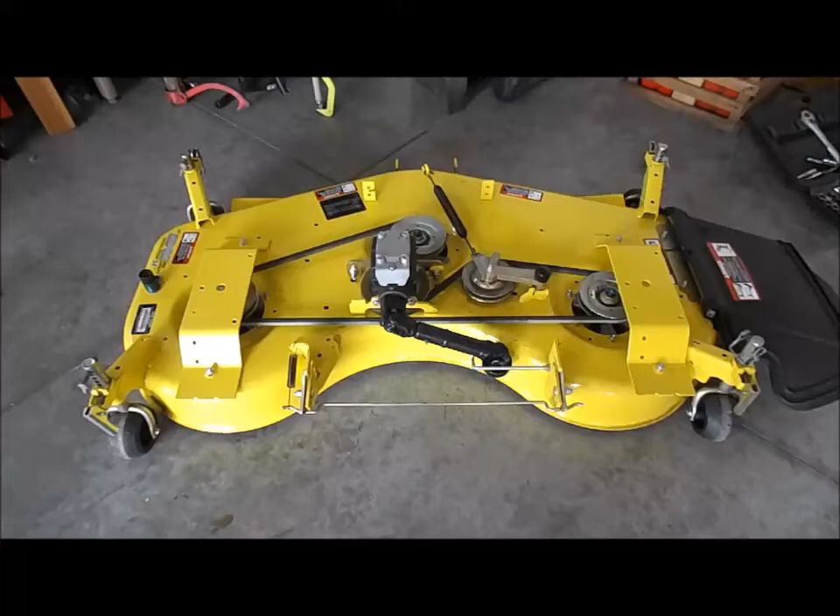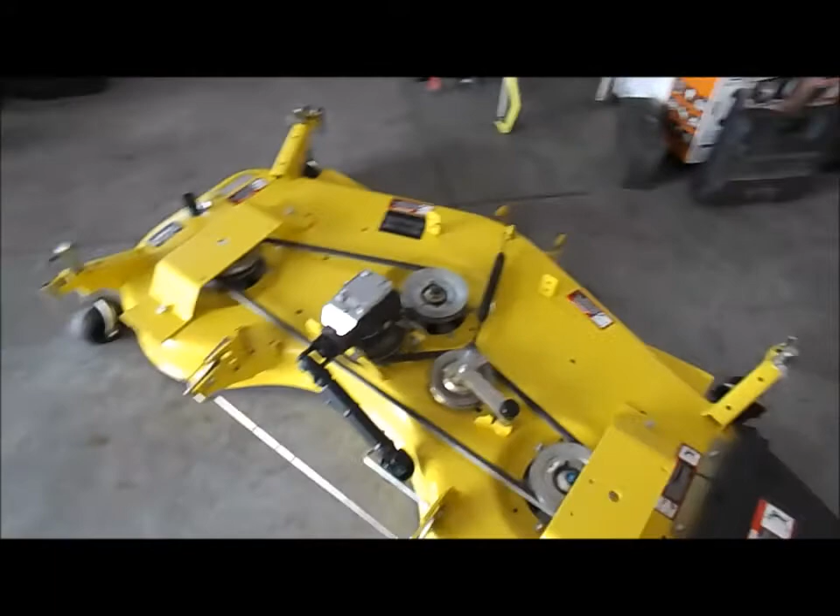Alright, so I'm getting set to put the deck back on the X738, and I thought I better check the owner's manual here because I haven't, and I've always wondered about this gearbox. Obviously there's a fill plug here and probably the oil check as well, so I'm going to check the owner's manual before I put it on the machine so I can do all the checking. I already went through and greased it, and I got to put the blades on after sharpening them, so let me check the book.

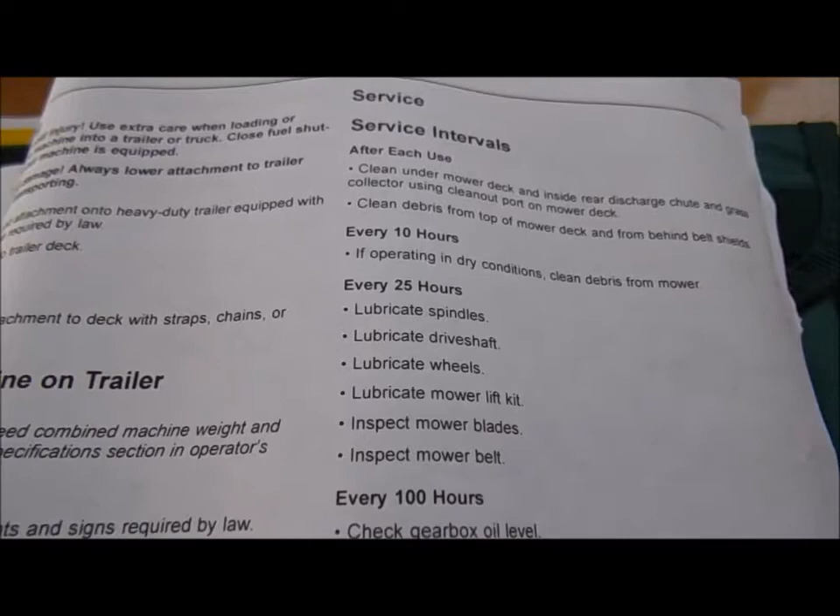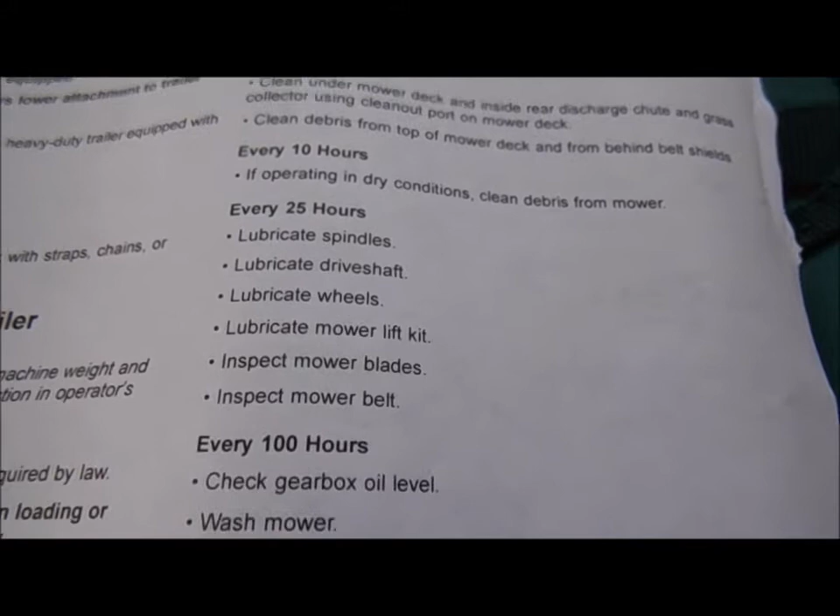Okay, going through the service intervals here, it says every 10 hours, if operating dry, clean debris. 25 hours you should lubricate the spindles, driveshaft, wheels, mower lift kit, all that stuff. 100 hours it says check gearbox oil level, and right now I'm at 108 hours on the lawnmower, but I did a bunch of snow blowing over the winter, so I'm going to check it anyway. Then it says every 500 hours you're supposed to change the gear oil. That's all it says on this page.

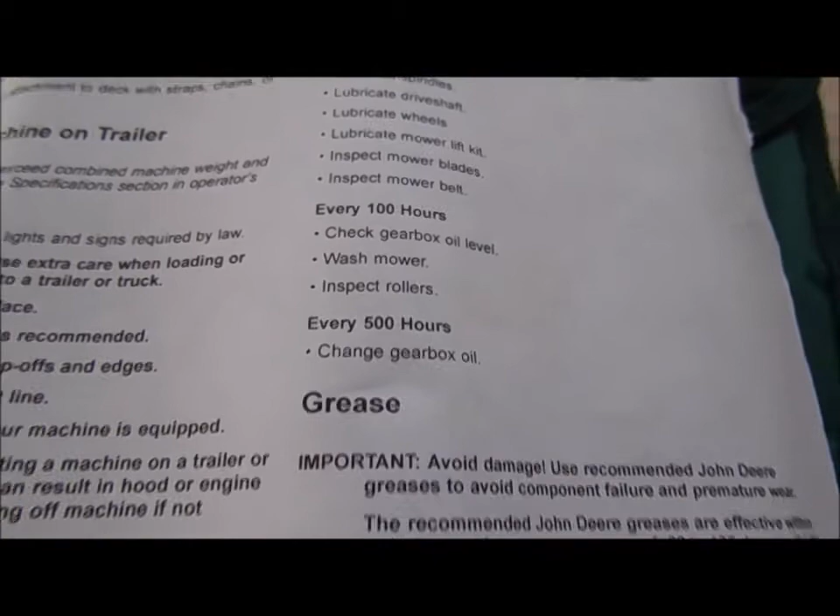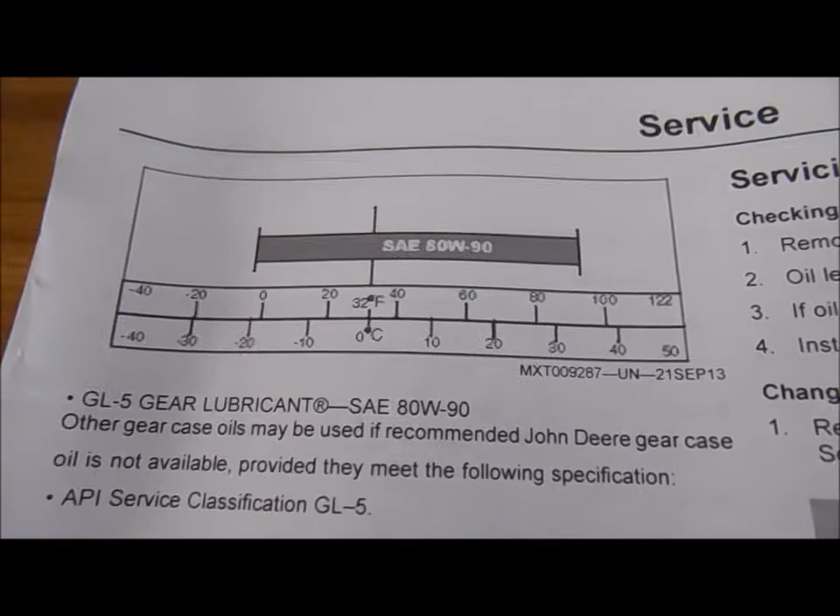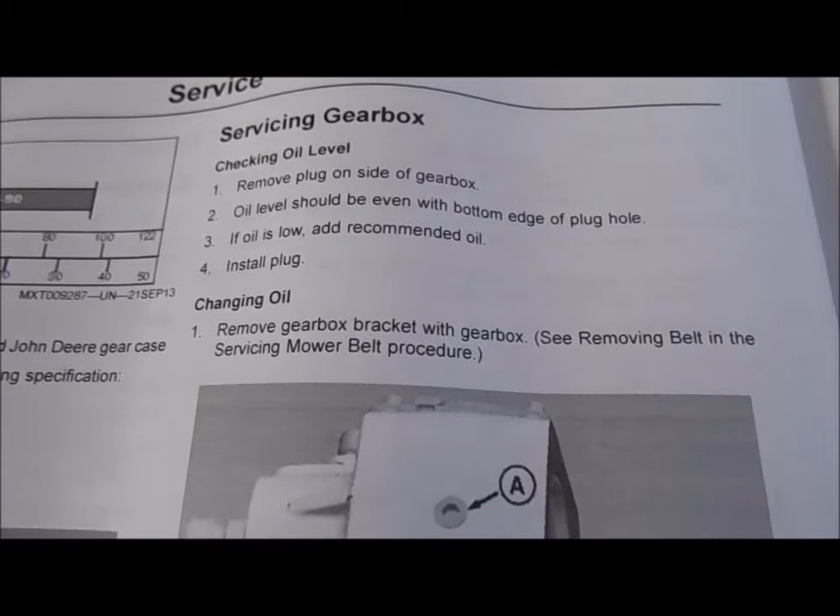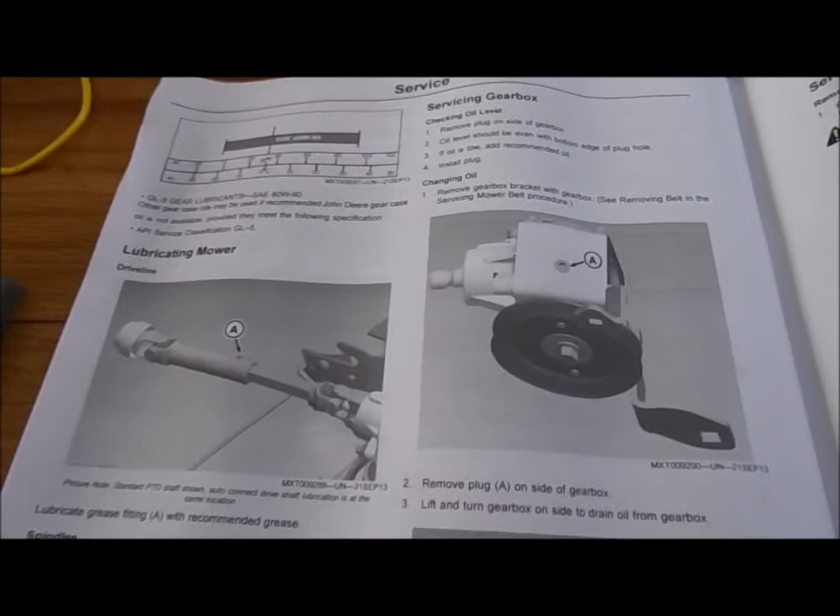If we turn the page, at the top it lists the type of oil, which I figured was 80W90, just a gear lube, GL5. For checking, it says you're going to remove that plug, and they show a little diagram here. Oil level should be even with the bottom of the plug hole. If oil is low, add oil as recommended, install plug. That's a pretty simple check, something some people may end up missing, and I would imagine a gearbox getting torn up like that would not be a good thing.

Alright, so what I'm using here is an 8mm, this is like an Allen type, square drive type that I'm going to go in. It's just on a 3/8 ratchet.

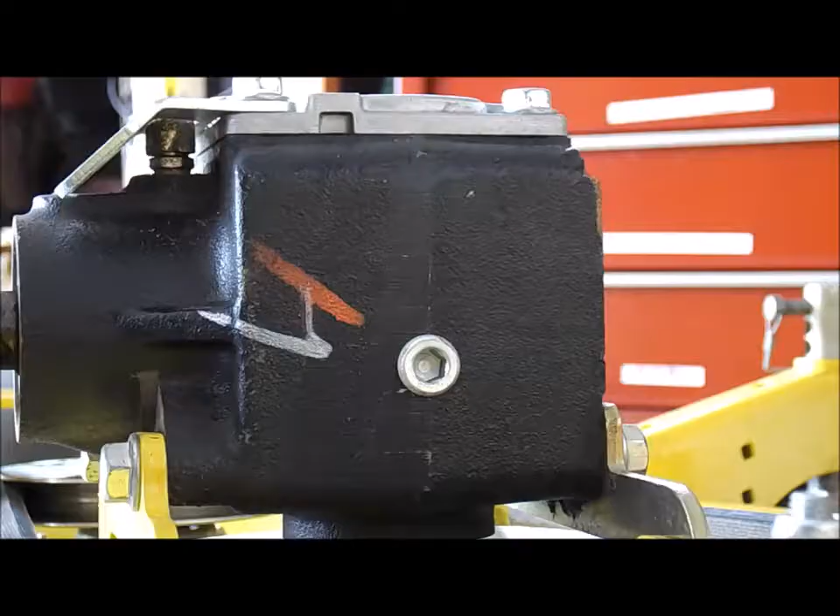Okay, one thing to note here, we'll see when we open this up. I'm going to take this out. This deck was actually set up on end just for storage, and I kind of chained it to the wall so it can't fall down. It stores nicely that way, it'll store upright real nice.

So I don't know if all this gear oil is where it should be. It's about 50 degrees or so in the shed here, so hopefully by this point it would be settled, because I've had it down here for probably about an hour. We're just going to take this out. I don't know if we'll need to put any thread seal on here or not. I'm willing to bet that as soon as we pull this out, there's going to be oil that comes out a little bit.

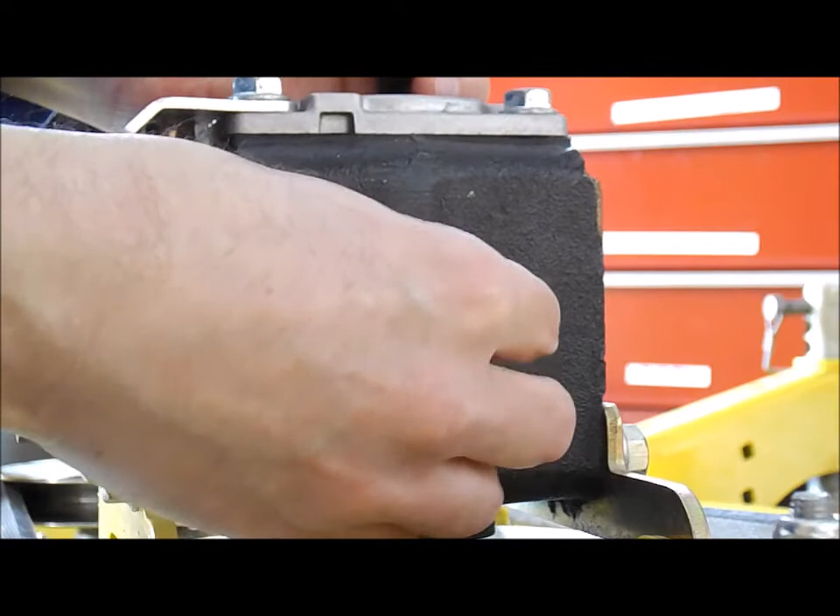It says that the oil should be at the bottom of the hole. Okay, well, nothing came out, that's good I guess. Wow, I don't see anything in there. That'd be cool, that's going to be a call to the dealership if there was nothing in the gearbox, because that should have already came prepped, ready to go. Let me pause here for a second.

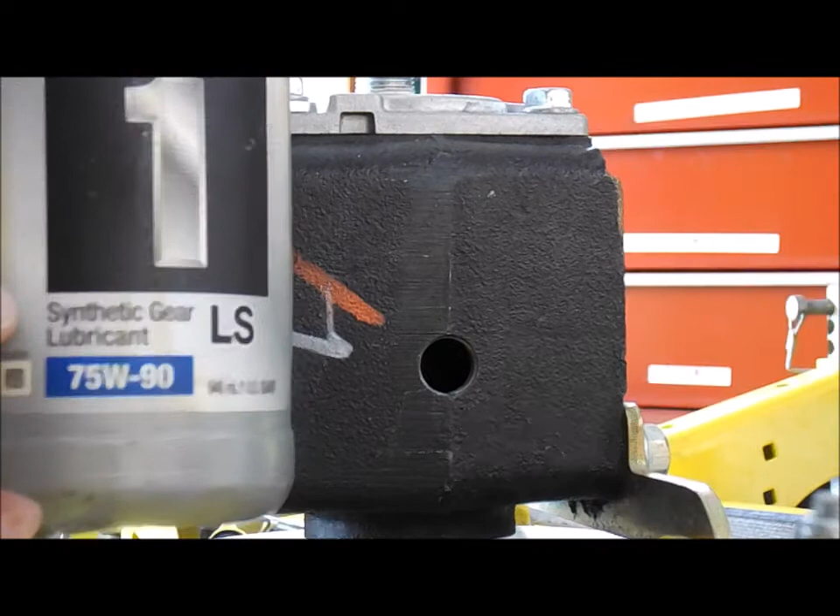Okay, so upon further inspection, there is oil in it, thank God. However, it's not to the bottom of the threads, it's probably just below, and according to what it says, it should be to the bottom of the threads. So I'm just going to use, you probably can't see this because I got the camera too close, oh, this is 75W90, that's not really the right stuff. I may end up putting that in because I'm not going to buy special gear lube for that little bit.

This is synthetic, I think I used this in a car axle or something, so I'm just going to put some of this in and we'll see how much it takes. There's not much in here either, because like I said, it was on a Crown Victoria, an axle seal bearing I believe. I don't know, it's hard to tell if I'm putting anything in or not. Yeah, there's not much in here.

I don't want it spilling out either, let's see how close we are here. Oh yeah, it's just now to the bottom of the threads here, I'll show you with the camera in a second. I'm just going to give it a little bit, whatever I got left in this container. Gear lube, smells good, if you don't know what I'm talking about, get some gear lube, take a big whiff. Alright, let me pause here, get my hands ungreased.

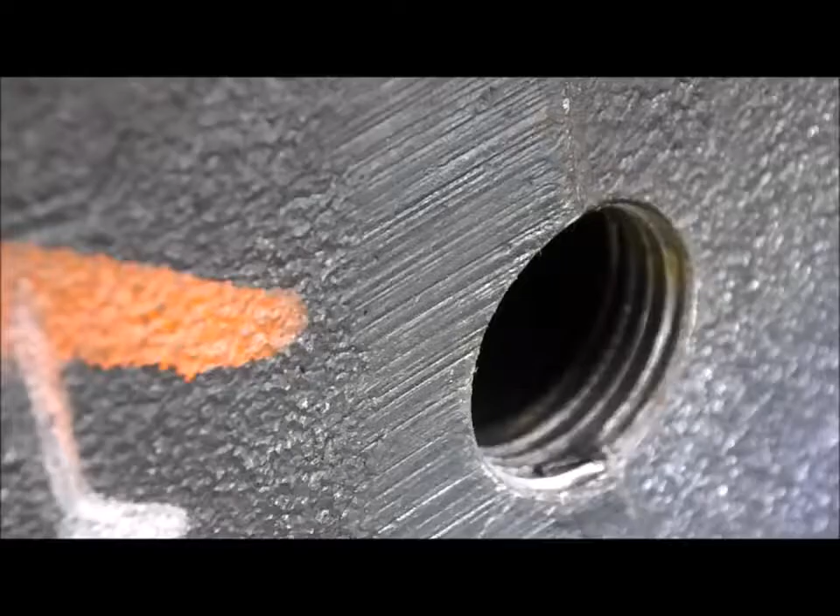Okay, so you can see on that inner thread the oil is just touching that, so that's perfect, that's exactly where you want it. You could probably put a little bit more in so it comes out, but I don't know how much pressure that would build up, and then you'd probably end up blowing out this seal here on the PTO, so you want to be careful with that. You don't want to put too much oil in. It looks like there is a breather right on top here.

So yeah, that's interesting that it was a little down, I don't know, who knows, that's why they have you check it I guess. I don't think it would have burnt any. The other thing is, I know a lot of people think John Deere is all USA built stuff, but clearly a lot of their components, the spindle you see right there, made in China. That's not impressive at all, but it seems like a lot of manufacturers are going the cheap road, going to China for their stuff. So again, we're going to take this and thread it in.

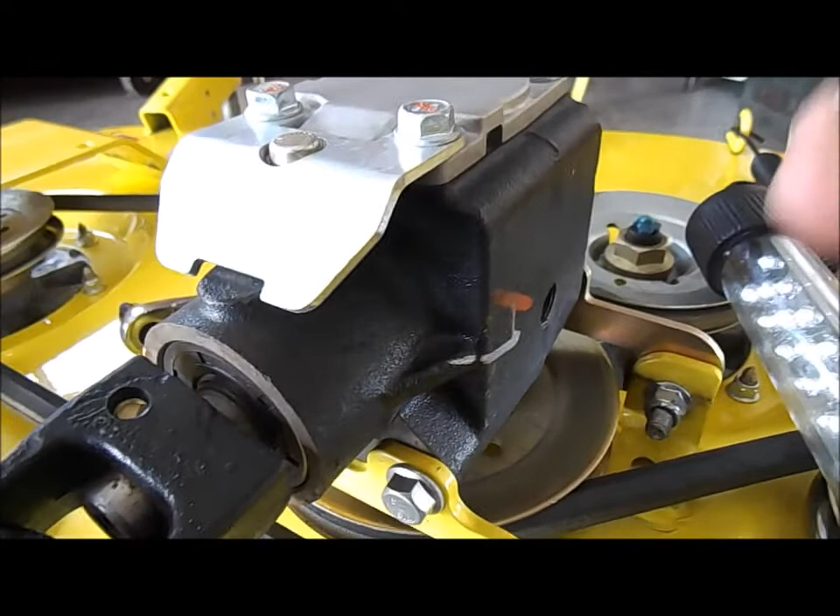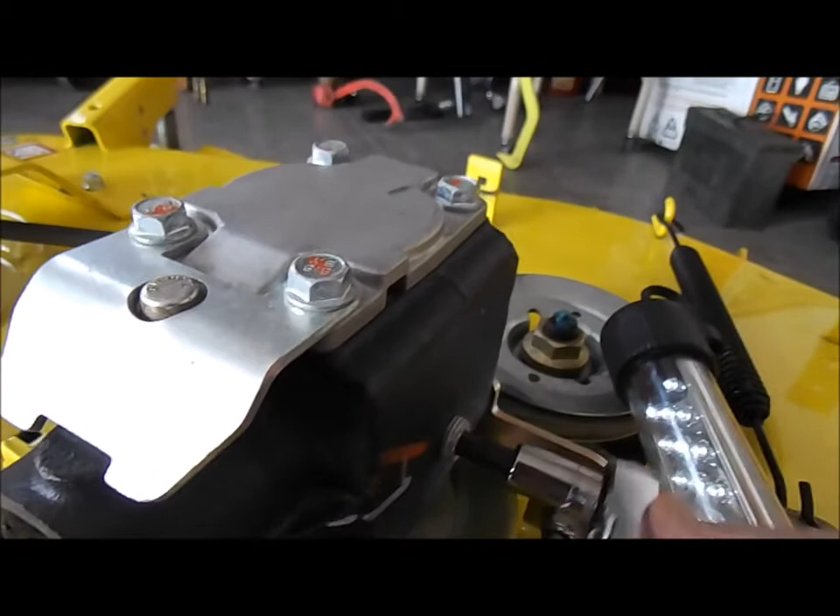Quick story here. This reminds me of a time I worked with a guy and we were installing a silo winch to run the silo up and down. His job, because he wasn't the brightest bulb, was to install the oil into the gearbox, and then it looked just like this plug. It was the same thing. He said that he lost the plug and he couldn't find it.

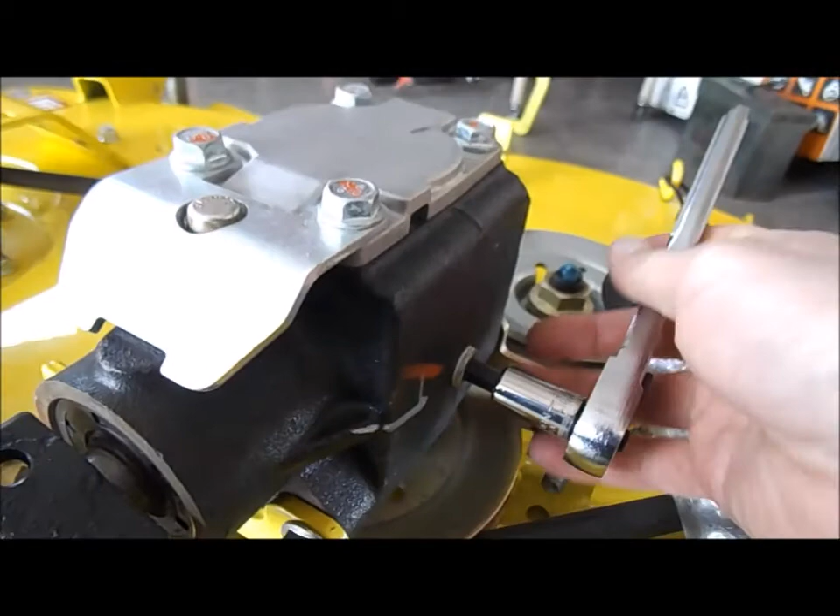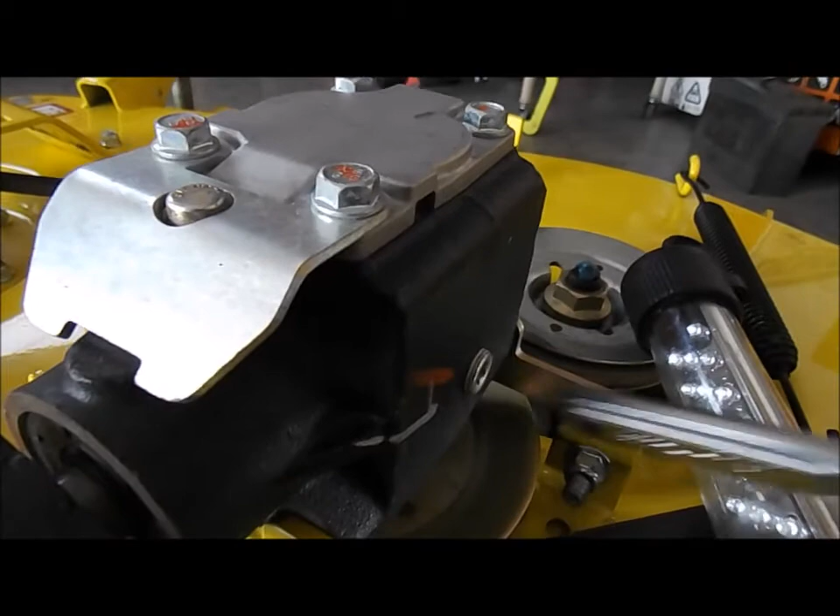The foreman at the time was like, all right, well, we need to find that plug. We can't run the thing without it. We don't have any extra plugs with us. So we're looking all over this floor and silage for this little tiny black plug, it wasn't silver like this one. Foreman's like, he was pretty convinced that the guy had screwed it all the way in and it fell inside the gearbox, because again, he wasn't very bright.

And the guy swore up and down he didn't. So foreman had me take apart the gearbox, and guess what was inside? That exact plug. So had we started that thing up, or used a different plug and started it up, it would have destroyed that gearbox.

Unreal. So yeah, make sure you don't run it in. And then after you put it on, you probably want to double check once you run it to make sure there's no oil here. If there is, I would just run it out, and either put some thread seal tape on or some of that black oil resistant RTV. So there you go, that's some maintenance stuff that may be overlooked if you're not careful.

So one of the things I'm getting ready to do here is change the oil, and I need to get the lawnmower warm. This is a good opportunity for the oldest to get an opportunity to drive the lawnmower around. She's pretty careful, and yes, the safety in the seat is disconnected, or there's no way that she'd be able to drive it without it quitting. I remember as a kid too, I would get to drive the lawnmower around in the spring just to get it warm before Dad would change the oil.

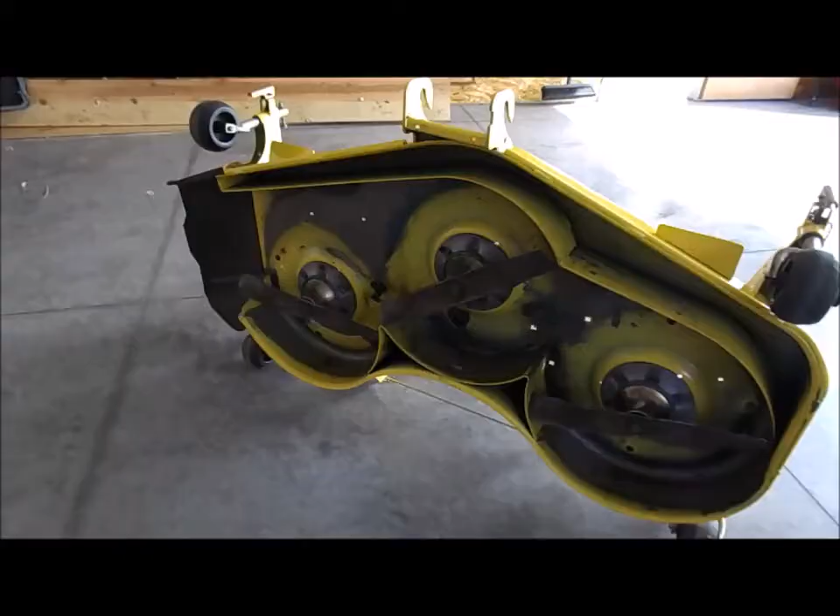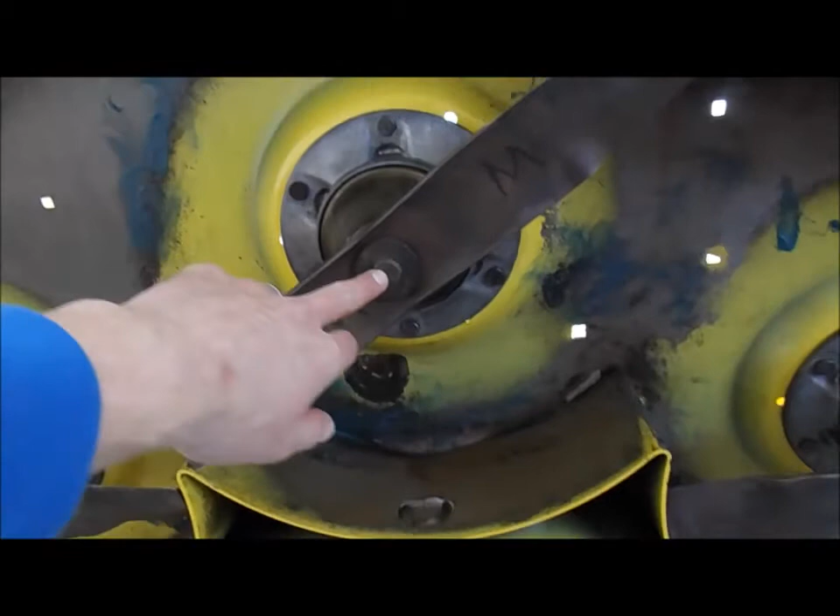Alright, so I also installed the blades on the deck here because I had them off to get them sharpened. If you're wondering, the bolt here does have a torque spec, it should be 50 foot-pounds. I used the 18mm socket and my half-inch torque wrench. I did, though, torque them a little bit more, to 70 foot-pounds, just because I didn't check the book. I kind of guessed based on the bolt size, so 70 is more than enough.

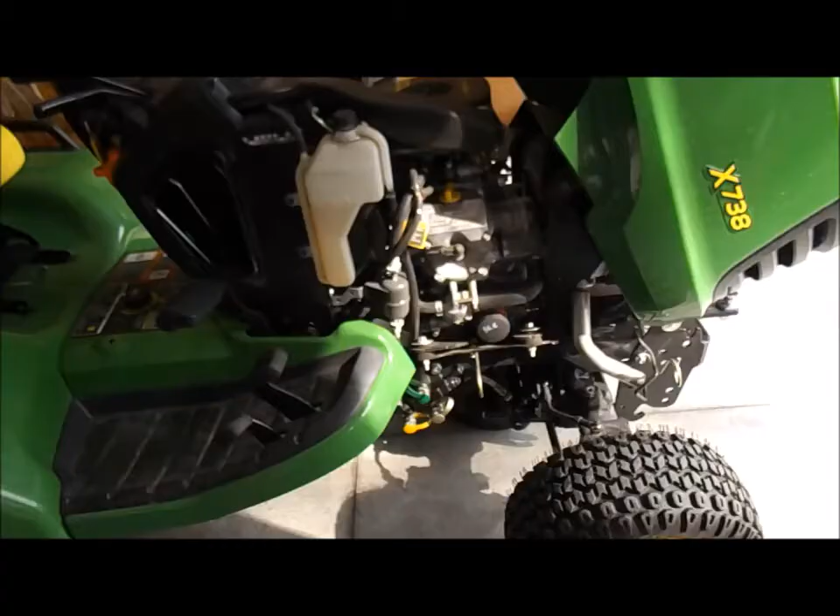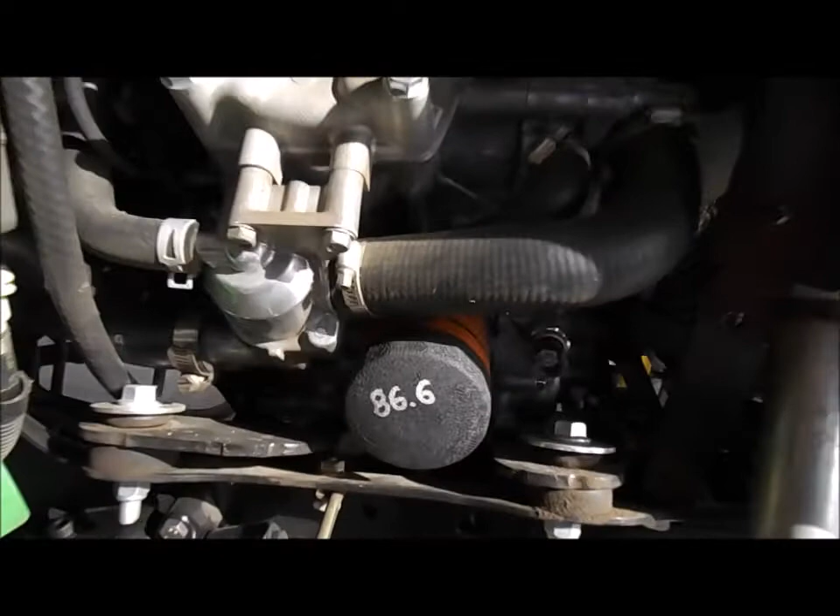Alright, so this thing is screaming hot, so I'm going to change the oil. I'm not going to show you how I do it, I got a different video of that up, you can look for it. I'd say it's about 108 hours on it, and the last time I did an oil change was 86.6. So there you go, that's where we're at with hours. I'm going to change the oil, and then I'll probably show you me putting the deck on once I get the oil changed here. The reason I'm doing the oil now without the deck on, obviously it's a little bit easier to get to everything.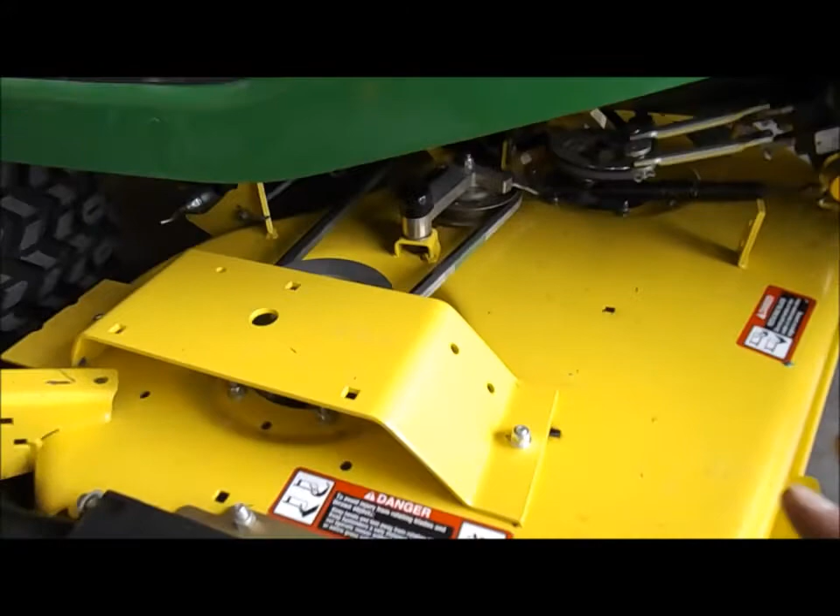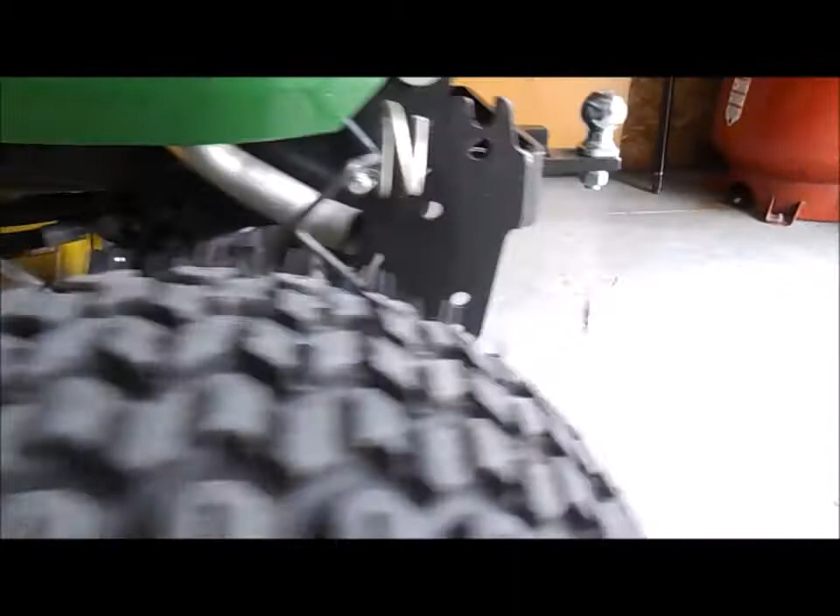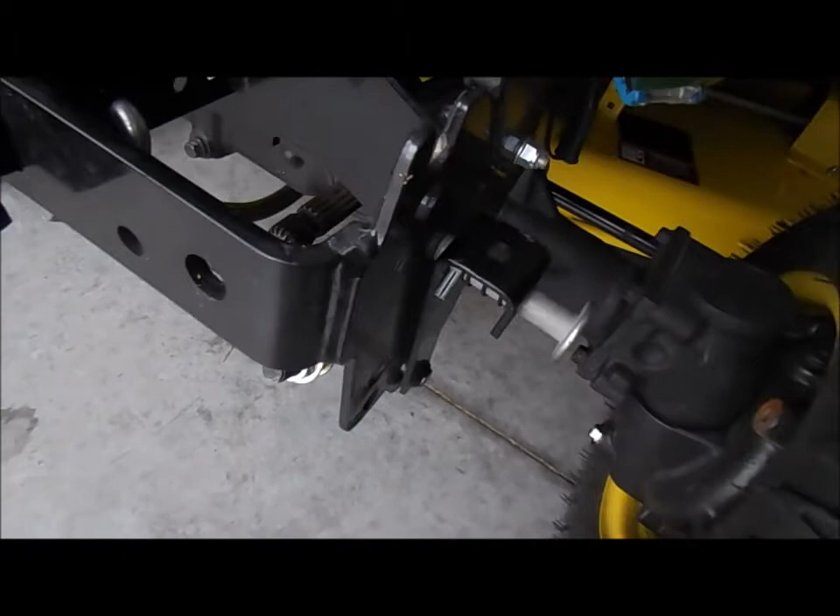Alright, so I got the deck on. Like I said, I think I got a video of me taking it off, I'll just show you the quick points of doing it. So get your deck outside, get it on the grass, because otherwise you won't be able to drive on it, it'll just slide ahead. Once you've driven over it, and I drive over it, I don't back over it, this bar here, get that stuck between those two pieces that comes up towards the front. It sits in here, sits in the other side, and then you just basically rotate it up with this here. The spring pin is what holds this in place, so you just rotate it up and it snaps in. The next step then is to make sure you get your...

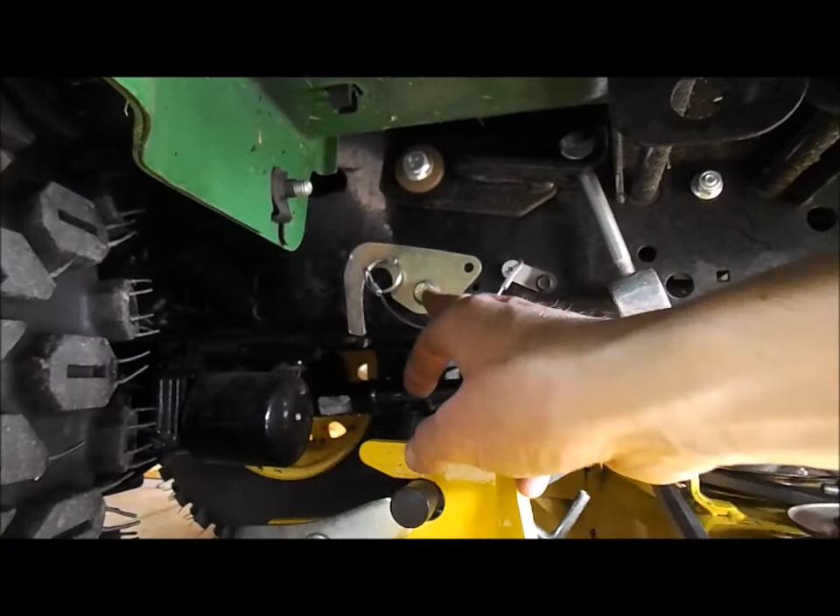This part here disconnects, because that holds the arms up, your lifting arms. For the snowblower, you don't need that, and there's a drive shaft that runs through, so you want to make sure you don't accidentally put those arms down. You pull the pin, pull that up, that lets these come down, and then you may have to wiggle the deck back and forth to get these bars to fall down. Once you got them in place, make sure that this is up and in the locked position, so when you lift the deck, you don't accidentally smash this bar against that little rod.

And then the last thing you do, you can see it is the drive shaft right there, is put that on. Don't put the drive shaft on first, because this bar will ride on top of that, and that's not right. So that's all there is to it. There's really three major things: that bar in the front, these lifting arms, your drive shaft. That's it, you're done, it's a pretty simple thing. You might have to do some adjusting on your wheels there to make sure you got them set right so you don't scalp the lawn. But other than that, it's a pretty simple setup. So I'm going to call this a win, and this should be ready for the season.